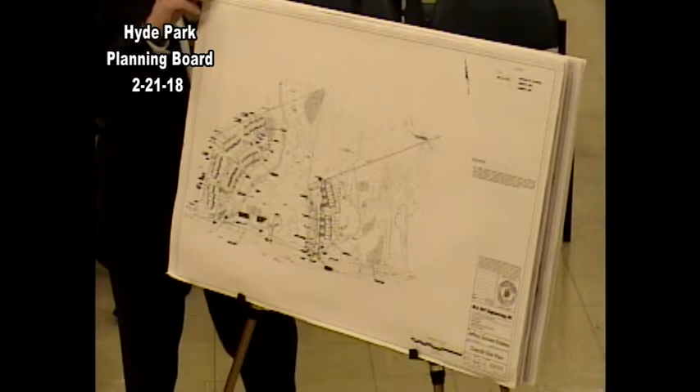All of the wetlands in the eastern portion are no longer to be disturbed. Let me interrupt for one second so that there's a little context.

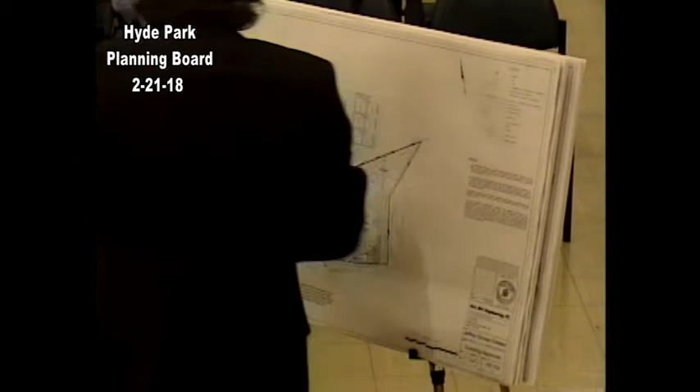This was the original approval. In the original approval, you had the two streets — they're unchanged. And this was Blair Road, sorry. That is essentially remaining the same, except that I don't believe we were aware of the requirement that you have to complete an entire phase in order to get a CO. So that has changed now.

So we are asking for, I believe, nine phases — one for each building and one for the sewer treatment plant — as suggested by Tad, Liz, and Pete, Mr. Setaro and Liz Axelson.

So that's the phasing. It's because we would, of course, be compliant with the requirements of the town in that regard, so that everything that you need to service the building — the sewer treatment plant, the sewer, the landscaping, and all of those necessities in the infrastructure — would be in place.

Sidewalks are included, power too, on the whole thing. So, as an example, let's say we build the first building on Blair Road — whatever outside would service that, which would be sidewalks, the entire road, all of the water, sewer, all of that infrastructure, would go in up front.

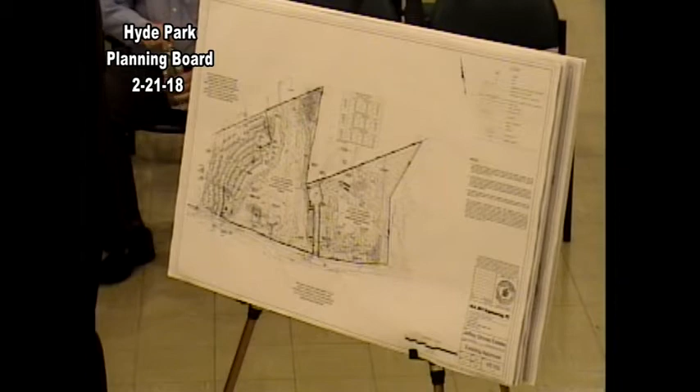The sewer treatment plant, obviously, has to work — you can't hold it in that long. Is that going to be phased also, or is it part of phase one? The sidewalks are part of whatever building we intend to build, so as we build them out, the sidewalks will match the house.

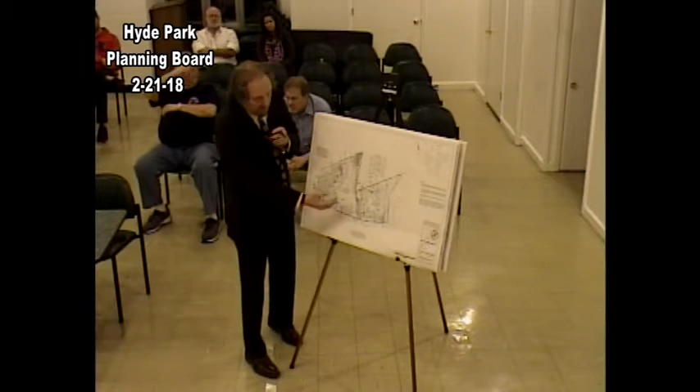But if we choose to build Blair Road first, then all of Blair Road would have to go in, and that wouldn't necessarily address Daniel's Way. And if I build the buildings on Daniel's Way, then Daniel's Way has to be completed before I would get a CO on that building.

I should explain that the board already has familiarity with a similar kind of project. We had a failed 78 single-family home subdivision where model units were built, and then the economy collapsed and it was foreclosed. After many years, it took one of the creditors a while to take control of the entire site.

It was re-subdivided with a site plan turned into 25 two-family homes for a total of 50 dwelling units. Just like this, we required sidewalks and we did phasing—every two-family unit is its own phase. There was much discussion, which is why Ms. Polidoro was asking about sidewalks, because these might be rentals, so we were discussing how to get sidewalks in at one time, which is why the board may have further discussion down the line about how to do the sidewalks.

The issue is a little bit of a difference. That site has a clubhouse with a pool and an activity court. So the question was how residents who might buy in the rear, or over here, or here, could walk safely to the clubhouse. In your case, this sidewalk is just to move laterally, and to get mail, and for guest parking to go to an event, whatever.

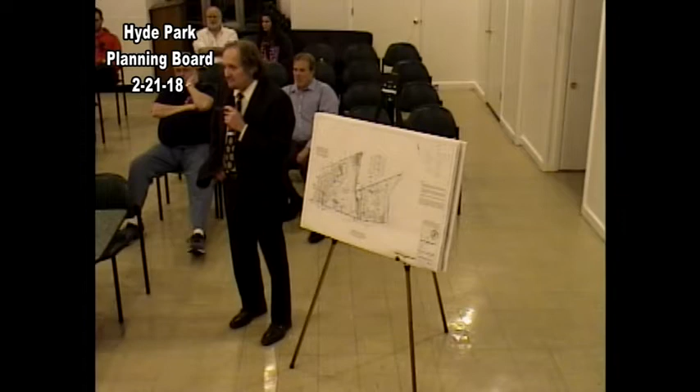So expect maybe some discussion about that, but I think what Ms. Polidoro was questioning was whether you would just do one piece of a sidewalk each time, or if you would do an entire sidewalk system. It's our intention to do the entire sidewalk, the entire roadway. I'm not going to do it piecemeal. That's what we do.

What was one of the site plan elements that would be done at the end? You said after everything was complete there may be some remaining site plan elements. I believe what you were referring to is landscaping for each unit proposed, lighting for each unit proposed—all site plan elements. If there are any remaining elements, like landscaping around the mailbox or something else, that would be the final act of completion.

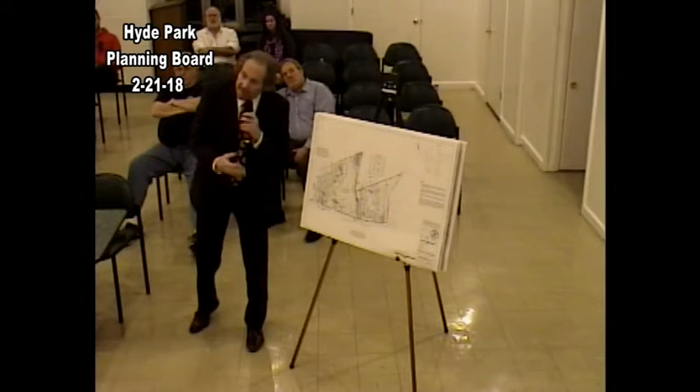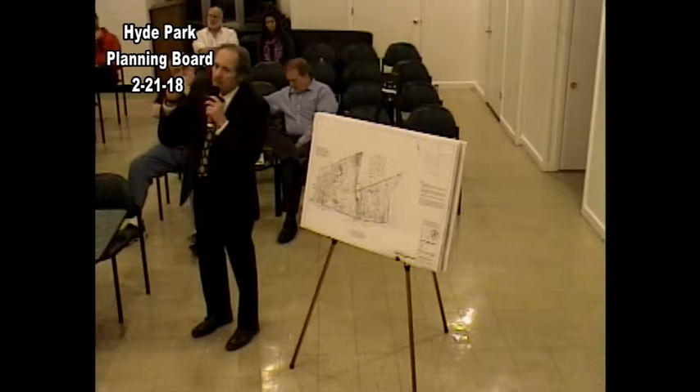Okay, so mailboxes—rather than on the single-family homes where they were getting delivery to their home, now we have a mailbox area that Brian has created for that portion. But by elements, you're not talking about anything major—the major infrastructure, the major site improvements, they're going in for the first phase. What we're not necessarily going to do is landscape every building until we ask for a CO on that building, so it would be easily identifiable as a building element versus a site plan element.

Rather than have a back and forth, let's wait until I can call on each one of you to ask questions. I'll also add that, similar to what we did with the enclave, I believe we'll be able to conduct simultaneous review in terms of public hearings. I hope the board recalls there's a little bit of a difference in terms of sequencing when you close out a public hearing for subdivision versus site plan, so we'll have to address that down the line. Again, the purpose was just to workshop it for the first night, and I think we can go to the consultants for questions.

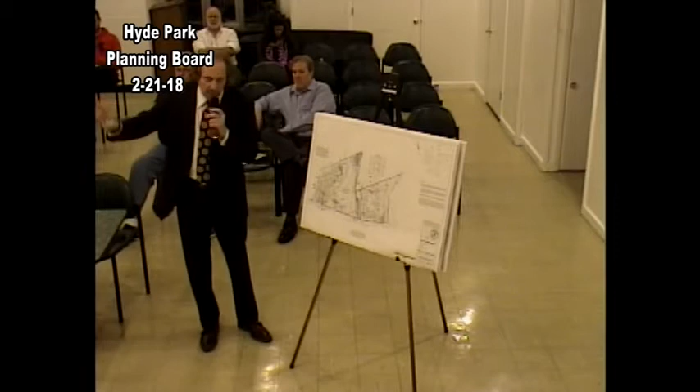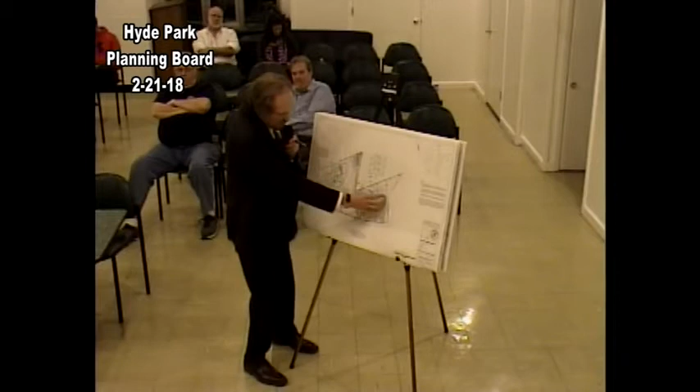Unless—just so the new members of the board understand—what we've eliminated is this was one lot, this was one lot, and then there were all of these lots. So now these two lots are part of open space, and all of this is open space except for that portion that is the new townhouses. And with that, I will step away.

I think it's important to recognize, as Mr. Watts pointed out, that the overall disturbance is going down by 25%, and equally important, the Army Corps of Engineers wetland, the federal wetland, will also have less disturbance because of lack of crossing. So this will guide us in our review. Without further ado, let me turn it over to the consultants. Ms. Axelson, comments?

First of all, I just have to say that the tables were very helpful, because when you eyeball the plan, you can see that it's less disturbance, it's more compact. I was really pleased to see a compact design. You squeezed a few more units on here, but it's a good use of the facilities you're creating, water and sewer-wise. So I was glad to see that. The tables were very helpful.

I know that in the offline meeting, one of the things I suggested was a 5-foot wide sidewalk for the new road, and then we went around in the conversation and came back and said, well, if it isn't built for the other road yet, let's consider 5-foot sidewalks for both. I did send a follow-up email to the applicant saying that might come up. I'm going to make the plug that it's going to make for a more marketable little neighborhood, because a 4-foot sidewalk is a little difficult for people to walk in opposite directions right next to each other. So why not make it nice?

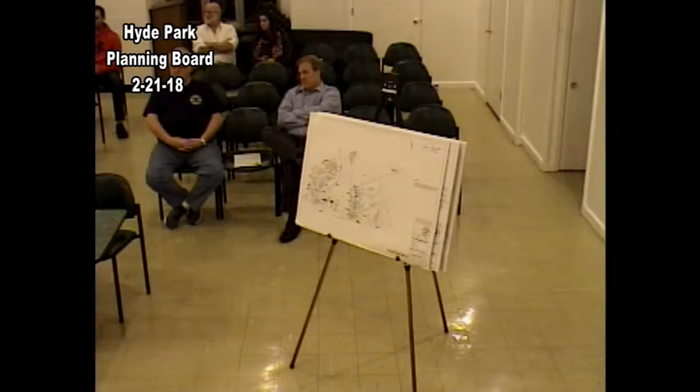Anyway, it's a pleasure to see you, and as soon as you alert Ms. Whitman, we can go ahead and schedule whatever meeting is appropriate based on the date of your submission. So we will get ready with our revisions, we'll wait for the comments, see if we can respond to them in the best way we can. And I thank you all, because my experience here has been very helpful. Go out and tell that to other developers. I will put that in the Poughkeepsie Journal if you'd like. No, that is my experience here, so thank you. Thank you very much, thank you for your kind words. We'll see you, I hope, in a month.

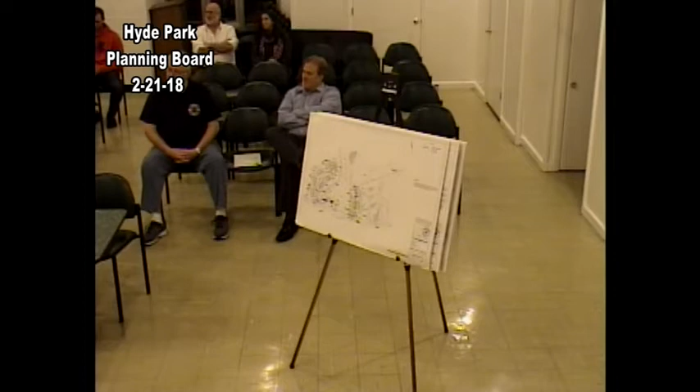The next item on the agenda is Hyde Park Town Center North, Buildings 3, 4, and 5. A note to the board, I sent a quick memo out. I apologize for not getting it out earlier. That's the problem with being away for 12 days, everything piles up when you get back. So it's been a series of meetings, but in this instance, as I put in the memo, we have a member of maybe the future tenant representative here tonight.

So in essence, as I pointed out in the file memo, we had an offline meeting with Mr. Alexander, Ms. Leibold, and Mr. DeGraw of the architecture firm. It was a wonderful meeting. Ms. Weiser and Ms. DiNapoli were with me, and we essentially took the architect through it, we spoke about the need to change the building where Feeds Plus is, and the fact that all the buildings look too rural, too barny. It looks as though they needed goats out there and chickens with it. I can safely say, buffaloes.

Bison, yeah, Bison, sorry. I can safely say that he got it really quickly. It was 3 minutes of talking. He said, oh, I think I know what you want, I know what you mean.

As I put in the memo, he was the principal architect who designed Warwick Grove, which, if you haven't seen, is a wonderful traditional neighborhood design. We're going to try to set up a meeting to go with Mr. DeGraw for everyone to see it, if whoever is interested.

They're working on revisions to the building. We also discussed the building closest to Pine Woods. Our code requires that anything longer than 100 feet requires articulation, which they don't have. So he was going to work up maybe somehow to change it. We thought maybe there was a way to do an overhang for like a covered porch or sidewalk pavilion there, but the roof slope is so low that he thought it wouldn't be a good idea.

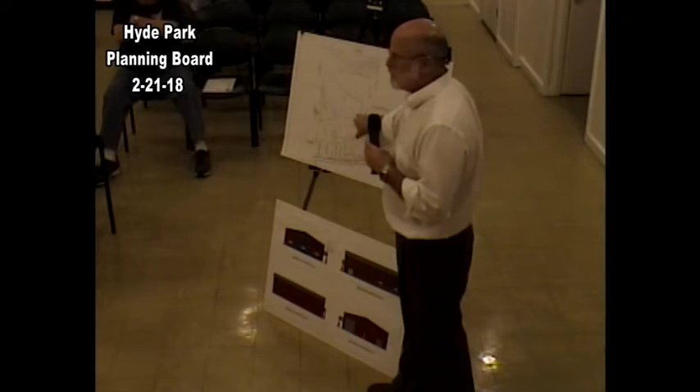There is an area in the center of the property where the golf carts are housed when they're on site. For the majority of the operation, a lot of golf carts are not at site—they rent, and they're generally not on the property. There is an existing single-family wood-frame residence, and it's in fairly bad shape.

We originally had shown the building on the south side, but because you're entering the existing driveway, there's a bit of a climb. We felt this was not an appropriate spot for the building because it's low, and we felt it would always be a drainage issue. So what we put together was a plan that relocated the building further to the north side of the property, utilizing the same driveway with improvements, because right now it's just not wide enough, so we are going to widen it to 24 feet.

We're proposing a 4,800 square foot building.

We've played with some colors, played with some structure. This building is a pre-engineered building just because of economy. We are proposing, this will be the side that faces 9G. This is cultured stone going up the apex. This is going to be, sorry, I didn't memorize the colors.

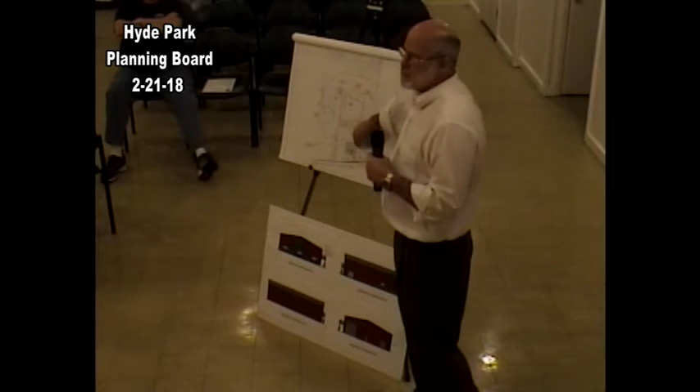There will be 2 tractor trailers on site because they do move these golf carts to certain areas. They will be stored here in the back. There's not a good view from Route 9G, so you don't have a visual of this back here. As you travel down 9G, there's quite a bit of an uphill. Once the building's there, it's going to be very difficult to see any of this in the back.

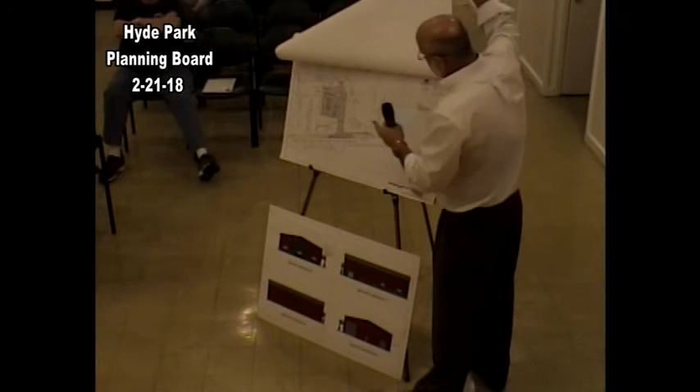Their intent is to just keep and operate this gravel driveway that goes around the corral and basically leave things the way they are. We have done a lighting plan, which we did include, and I don't know where it is, but it's in here. We have proposed landscaping, which we met with the board on a couple of weeks ago. We've proposed a considerable amount of landscaping to offer a buffer to the south.

So we are proposing a ground mount sign in the front of the area. As you can see, we're proposing a DOT entrance to meet the standards required by the DOT, and we will be making that application. We will also be making an application to the Board of Health once the weather dries up to resize the septic system for the new building.

Thank you. Anything else? For that.

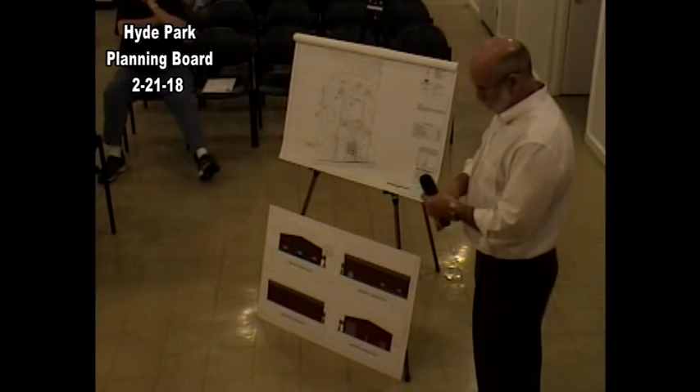So just again, for the board's edification, I believe that I sent out a memo where there was an offline meeting where we discussed architecture and some of the elements about landscaping that were required. That's what Mr. Day is referring to by saying he met with the board.

Let me start with Ms. Axelson. You're our go-to person tonight since you haven't been here for a while.

So I had a hard time finding where the vegetation was in front. That's what I was looking for, so we might need you to show more detail. In other words, the landscaping plan ultimately is going to show us where your existing vegetation is that's going to stay, and in front of the building, between the building and the road, what's there.

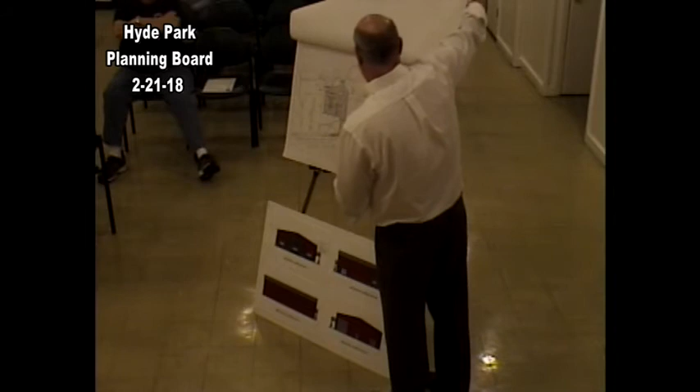There are some trees now, but I think they're being removed. Yeah, they're being removed—they're very tall pines, not of very good quality. I guess that would be the concern I would have, would be the view from the road of the building, because it's kind of a big building.

So, we can have that tree back. Yeah, actually, what we have showing as trees that would remain—the trees that were in front were actually removed. We're showing, as I said, proposed landscaping.

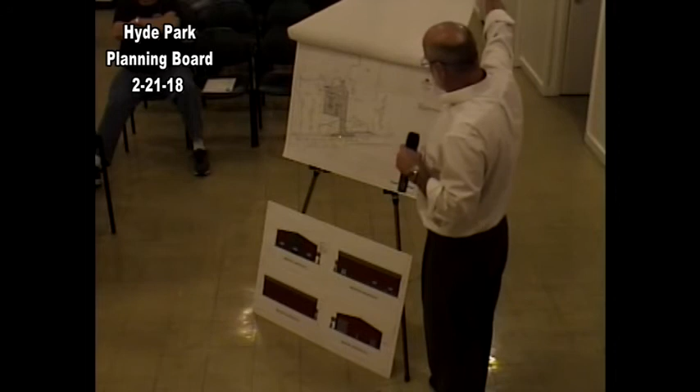Pretty detailed, I want to say—there's a considerable amount of proposed landscaping. But not in front. If you think that they had originally proposed it here, the required screening is between residential, i.e. there and here, and non-residential use is this. So they've screened out basically the big commercial use in the back by planting a series of evergreens through here, so that this house has the visual buffering.

There's no requirement from the street to here that there be buffering. I was just thinking in terms of softening the look of the building from the street. We couldn't require a buffer, but maybe a tree or something that would also help cool it down in the summer.

Mr. Day didn't mention it, but the current driveway kind of angles, and they're better aligning it with the roadway across the street now, which is what DOT will prefer. We all should prefer a four-corner intersection, as opposed to the offset ones we're supposed to avoid.

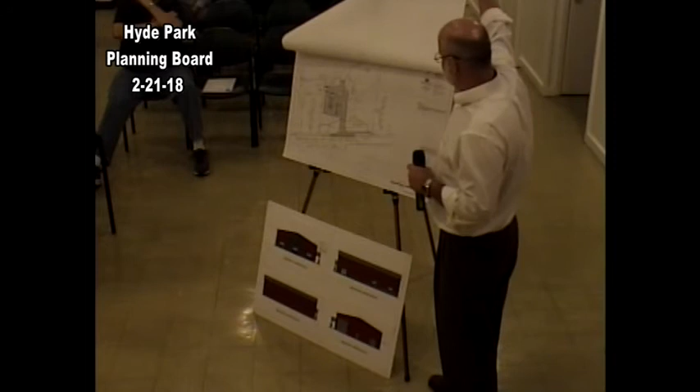At any rate, that's another improvement he's making through there. I think the board would take it under consideration to add a tree in the front, just something to soften it up.

And then there, what about a golf cart? There you go, with some lights on it. Your sign could be Christmas lights, a golf cart that has- that's right. Put it up on a rotating pole. They're working on that right now. Rotating lights, something on a pedestal, with little ten-inch letters. Okay, we needed it.

So I'm guessing that the parcel access information that I got from the county isn't up to date, because you have this little parcel in between, and then you have a driveway coming out the other side?

Oh, actually, yeah, I believe you're right. This is an exception, an exclusion to this property. This property has frontage both here and its main frontage. There's also a 50-foot access that does go there. This is a survey that was prepared by Marie Welch.

So will you be using both driveways? This driveway is existing; we are improving this driveway for tractor-trailer use. They are using this now for tractor-trailer, and they're also using this for tractor-trailer.

Gotcha. Because at certain times, this actually has more visibility to a tractor-trailer than this does, so they are using this now. The intent is to develop this as the main entrance.

Right, okay. Am I right or wrong - does this residence use this entrance as well? Do they have a separate driveway here, or is it the same driveway? That's what I thought - so in other words, this is a shared driveway for both parcels.

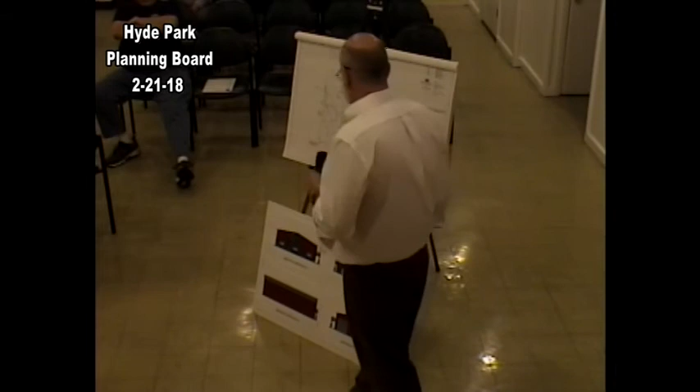I think the confusion on the building height was that in your zoning table, the maximum height is 40 feet, but existing and proposed just says less than 40. If you have an actual value, that would relieve all that worry. We got a comment on it from Ms. Moss. We also responded that at the time we did not have these elevations, but we knew it was going to be less than 40.

So will it be... oh, hold on. Oh, I'll call on you, I'm sorry. Let's just, we're all getting punchy now.

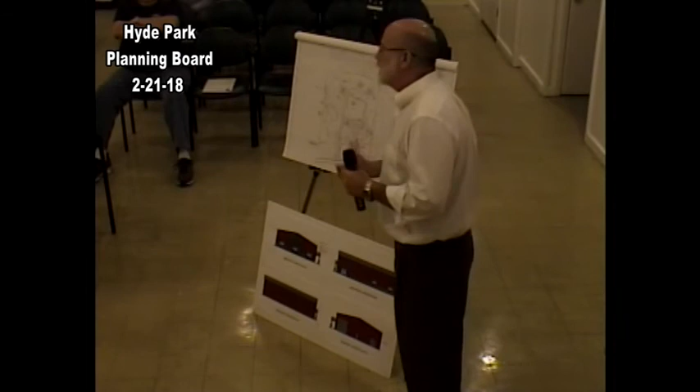One more thing, it looked like there were land banked parking spaces or something like that. We do, yeah, we are proposing land bank, because you probably won't really need the ones you're proposing that are going to be paved. Correct, they don't have a customer base that comes to this. Every once in a while someone comes, but it's rare. It would only be for the one or two people on site. We had one person today.

Are the land bank spaces included in all of your calculations? Yes. I mean, I'd prefer to see them myself land banked, because does it make more sense to waive the parking than to have it? Wait, it's not a waive. Remember our parking guidelines are only guidelines, not a standard.

So there's a total of I think 16 spaces, and I doubt you'll even need 8. There's 8 on one side, it doesn't make sense. 8, they're adjacent to the building, not paved. It's silly. So just for maintenance of the site, we'd rather just pave it, leave the other ones banked and grass. That's why we split it the way we split it.

I was just asking if banking has more legal ramifications, which is that we need to have notes on the plans about when you can build it, et cetera.

Does it make sense for the planning board to just perhaps modify the parking altogether? The way it's calculated is based on size of the building plus total number of employees. The size of the building is large enough that it requires you to have more parking for it, but the specific use does not entail that many parking spaces.

However, if we're thinking about planning for the future, what if they sell it and need more parking spaces because the size of the building is such that other people need it? I mean, I'd rather it be banked myself. As long as the land bank spaces are included in the calculations, and we have clear language about who decides when those spaces have to be built and what the process is for building them once that decision is made.

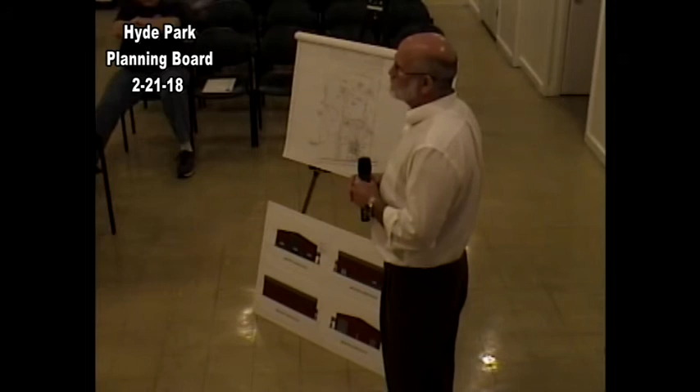You're quiet tonight. Well, it's a pretty simple application. I'm sure there's going to be some comments on the building, so I don't want to take up time. There's really not much from an engineering standpoint. It's a very small parking lot. Drainage probably won't be an issue. The State Department of Transportation will approve the access, and the Health Department will approve the septic, so it's pretty minor from an engineering standpoint.

Good to hear. I just want to emphasize that Mr. Day didn't show it, but having walked the site, the grade does fall pretty substantially back here. There's an underground storage bunker that you can access on one side right now, and you can kind of walk out over soil on top of it, which I think is going to be retained.

Overall, one reason Mr. Day kept saying you may be familiar with or may have seen it - I met you a long time ago and you mentioned storing golf carts, so I had to drive slowly to find it. When the leaves are on, because of the drop down near the trees, you don't really see it. But if you go back there, Mr. Day was saying it's really cleaned up.

The rest of the board hasn't seen it, but Ms. Moss showed me pictures - there were things kind of all over the place. So what they've done is corral, or pen is the right term, and literally moved everything to the center of the site, so it's minimized and there's not this sprawling area out there. Yes, there's successive green growth, weeds, grass coming back through because they've removed a lot of the gravel, which is better for us for drainage to go right back into the ground.

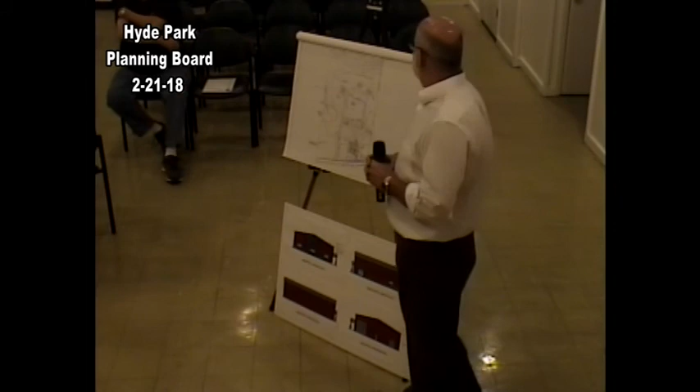Just to soften it, a landscaping element. We can do that, what that's if you do definitely, foundation plantings instead of a tree, just to decorate the front of the building and keep the sight line to the building. It's certainly up to you guys.

I mean, I don't like foundation plantings myself. Actually, I hate them because they grow tall, they cover up the windows, and they cover up the cultured stone they've added. And if you're living inside a house with foundation plantings, you don't really get to enjoy them, it's people from the street who do. So I like to have gardens out where I can see them myself, but that's just me. It's up to the rest of the board. When we call people, we can ask.

The other thing is we can't plant too close to the road, because then the sight distance drops right off. Well, I'm thinking just one tree, a nice shade tree that would ultimately reduce your heating and cooling costs. That's easy to do, I'm all for that.

They tap out at probably about 12 to 14 feet, you need 7 feet or so to work under it plus the cart itself. Because the golf car with the top on it is about 6.5 feet, and if it's a lifted golf car it could be 8 feet, and you'd have to lift it up to get underneath it.

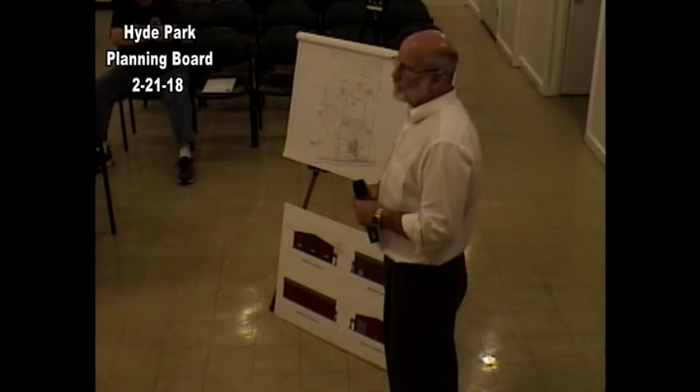Ms. Weiser: So I think this is a vast improvement from the first iteration. It's really looking lovely. I appreciate that you used the arts and crafts style of architecture here. And just because, and I know this may not be possible, but because there's such a vast space of nothingness here, if it's remotely possible to continue the feeling of the arts and crafts.

So, here? Yeah, okay, I'd sort of like to consider differentiating. I'll send you this picture. Because this is a really good, nice little arts and crafts house. I mean, we could bump this out and create a gable. It'd be nice just to get a little bit more architectural detail up here, because I think it's a really charming look.

On the south elevation, again, just a suggestion, I would consider another window here, just for symmetry. And again, more of the eave-type decorative trusses could be nice. Okay. Then on this one, nothing.

And I only think windows here because people are there, and natural light really helps people. It's not about breaking it up, and I know maybe the code doesn't say you need it, but people really like a lot of natural light and it makes them work better. So we had windows. Okay, that's it. I have an idea for that.

Ms. Weiser, I like what you just proposed much better than what I was going to say. This has been bugging me. I do like the craftsman style columns that you've done, I like all of that. And I know Ms. Moss was at first like, this is a fake entrance, why are we doing this? It's because it relieves it. Yeah, it really does. I like the fact that you now have a double version of it. It's that area up here that was getting me.

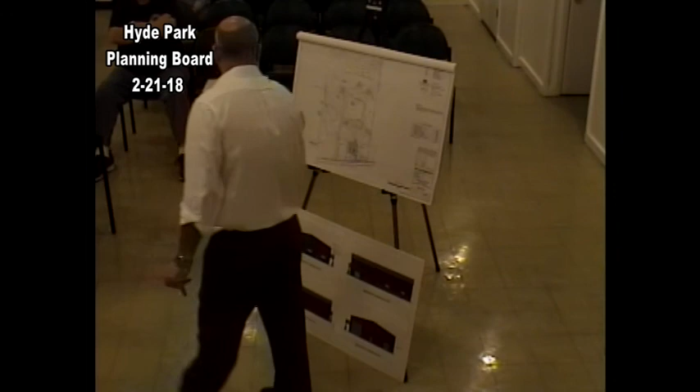And I don't know, we should, we can get a comment.

They need a variance from the ZBA because the building they're proposing is larger than the structure they're demolishing. So you need... I thought it was about scale. Maybe you exceed scale. Yeah, that's what I'm talking about - you're going above it, yes.

I'm not certain of the process. Do we go there next? You can apply there. The planning board will circulate for lead agency and we'll include the ZBA. The zoning board won't be able to grant or deny until SEQR is completed with this board. But you can start the process because they only meet once a month, so it makes sense for you to get on their agenda so they can set a public hearing while this board is reviewing the environmental impacts.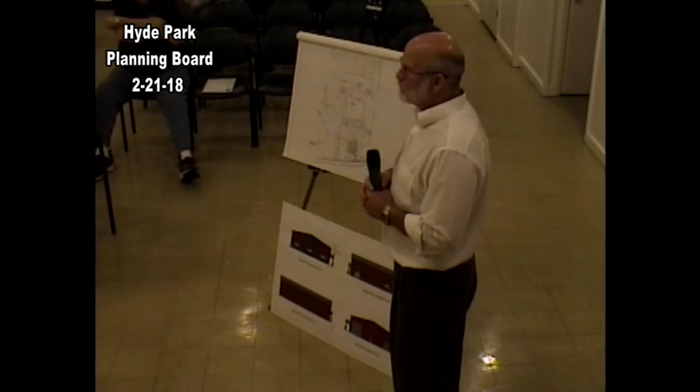Okay, we'll do that. I'll add that they usually seek a recommendation. I think I can already tell where the board would go in that recommendation based on comments tonight, so I can get that prepared in advance. The ZBA meets once a month, so it takes a little longer to go through that process, but that gives us ample time to conclude SEQR.

I want to point out that even though there may be a little bit additional, there's not really going to be any additional traffic whatsoever. They already have the golf carts there, they're already utilizing the site in this same fashion. There'll be somebody going to work every day back and forth - you and your brother - but there was already somebody living there for a while. You, at one point, lived there for 10 years. In other words, the impacts are minimal.

I do think that when we circulate this to DOT, I think you're going to probably get comments from DOT about this. I'm just anticipating it because having worked with them for a long time now, they tend to go back and say 'wait a minute, where?' So you may get comments at that point, but it's been used for so long, I don't think that's going to be a big deal.

So as soon as you get the plans ready with small revisions here and there, then we can make it. I want to also weigh in - I think a tree in the front is nice, a good bang for the buck. Otherwise, we should be ready to go as soon as you are ready to submit.

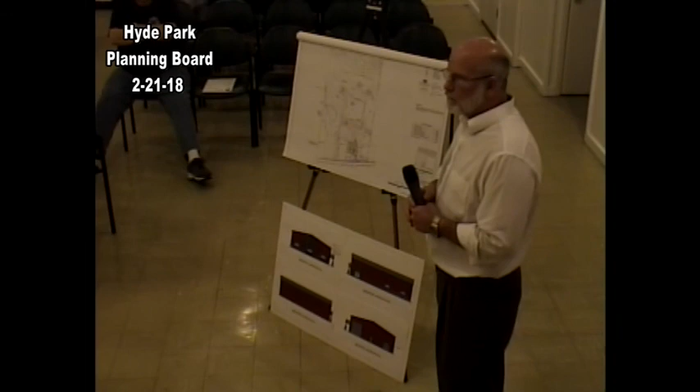We're going to probably get our comments out the end of this week. Also, the ZBA meets in a week, and their submission would have been a week back. So if you can get that going, we'll be able to conclude SEQR in time for them to take the review. It's a protocol between the ZBA and the planning board, since you've been doing more work in the town - anytime we start the review and they're involved, we do the SEQR on it.

Okay, very well. Thanks so much for your time. Awesome, thank you, thank you. Okay, whew, last but not least.

Mr. Quick is proposing a ground-mounted solar project for his residence at 5 Phillips Drive. He's also going to need a variance, an area variance for disturbance within 100 feet of a stream from the center line. Having seen the site - we actually had this application before, Mr. Quick was part of an application for the pond, for the dam. You remember? Oh yes, that one. So this is entirely in a neighborhood where the area around the stream is totally disturbed.

If there's wildlife walking along it as a corridor, it's maybe skunks and deer. So if I'm required to write a recommendation from the planning board for this, I would hope that we would make a recommendation positively. When we met with the applicant initially offline, we told them our code requires screening, so they proposed screening around the site to make it not so visible from Phillips Drive itself. But otherwise, there weren't too many issues on it.